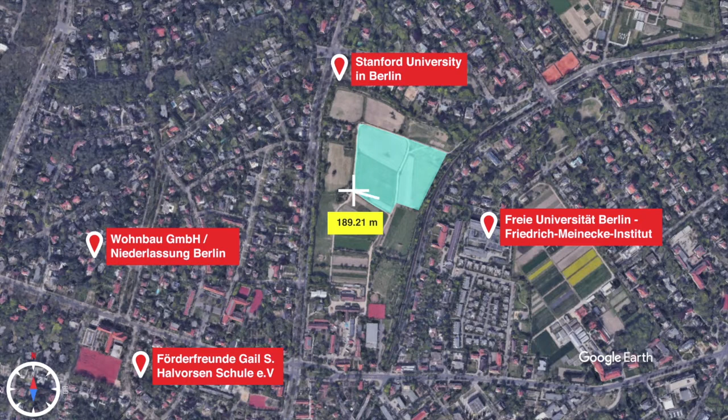The impact of COVID-19 was drastic on schools. Several countries were assessing how to deal with the situation, and for many, options included remote learning. Moving on to the site analysis. From Dubai to Germany, to its capital Berlin, to an area in the southwest of Berlin called Dahlem. The site chosen is accessible by several roads and surrounded by many schools and universities. It is highlighted in light blue.

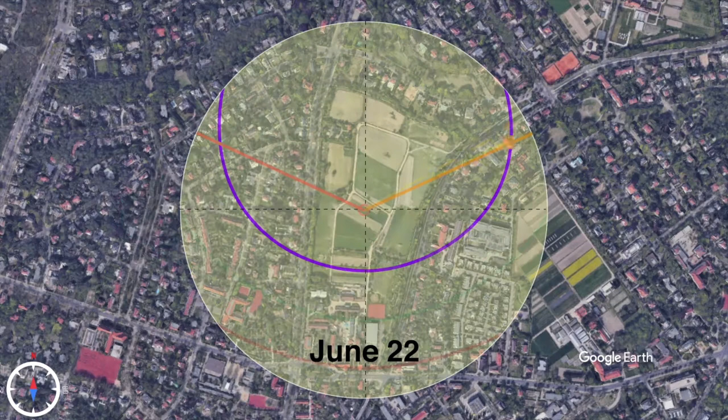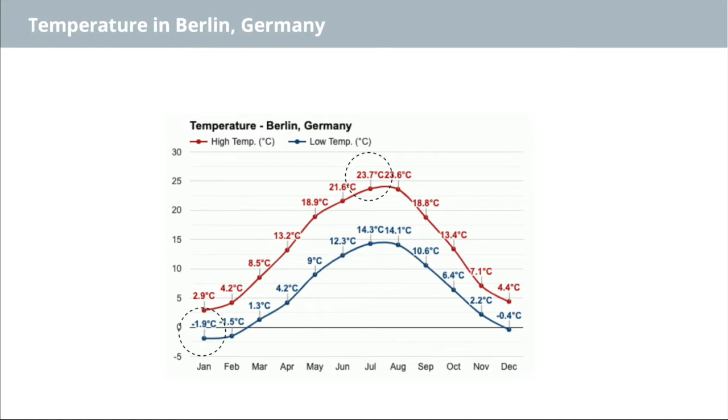Wind direction is from southwest and west. And this is the sun path. As for the temperatures, they reach a high of 23.7 in July and a minus 1.9 degrees in January. Next is the concept and design.

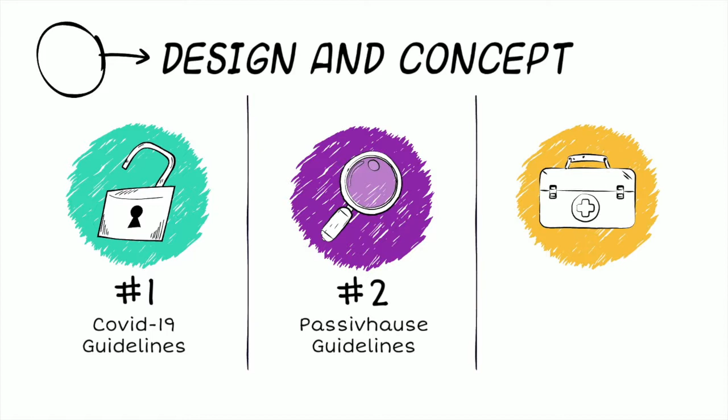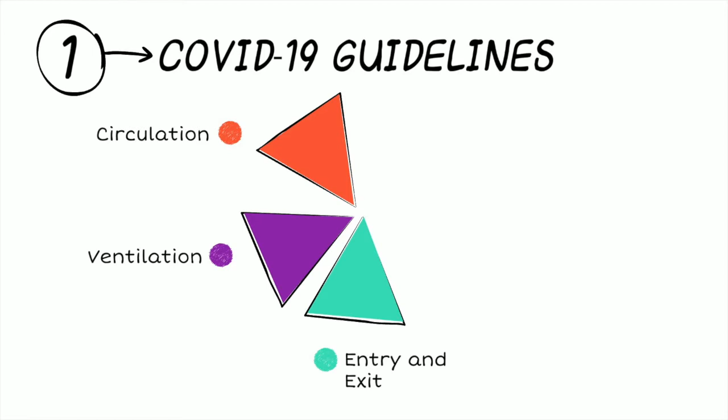The design was derived from the COVID-19 guidelines, the Passive House guidelines, and the immunity system concept. The COVID-19 guidelines for schools recommend one-way circulation, increased ventilation, several entry and exit points, open space, and having points for checking temperature. Passive House was put by Dr. Feist in 1999, and it relied on several things, for example, proper window insulation and proper orientation.

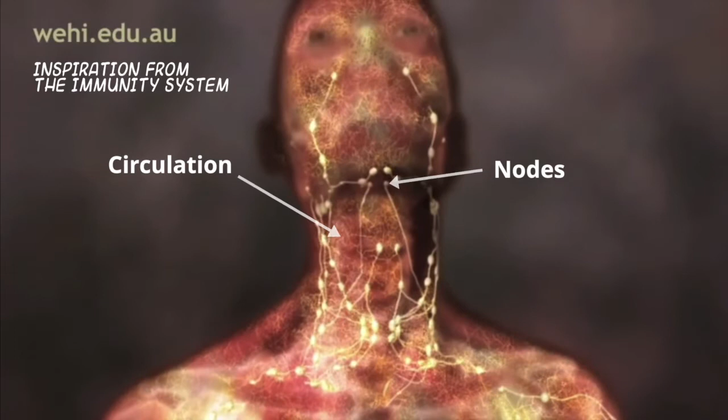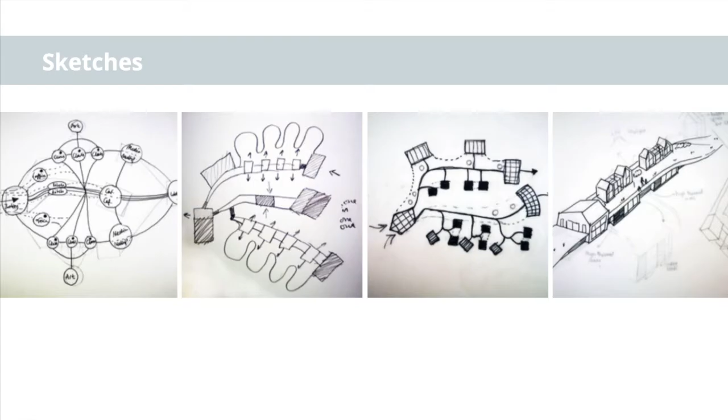As for the concept of the immunity system, it inspired breaking up the school into nodes and connecting it via a circulation path, just like the nodes and the circulation here. In Germany, there's an average of 20 students per class with a ratio of 1 to 12 teacher to student. The school will operate at 40% and fit 80 students due to COVID-19.

The Grundschule will comprise of 2 classroom buildings. On the ground floor, each will have a large open space that can accommodate a lab, an art room, and an eating space. On the upper floor, there will be 2 classrooms. The Grundschule will have 1 main building. Its ground floor includes the lobby, 2 clinics, and 2 isolation rooms. The upper floor is office space.

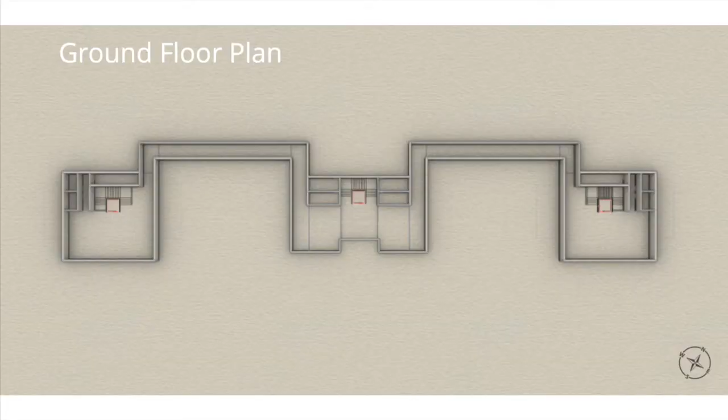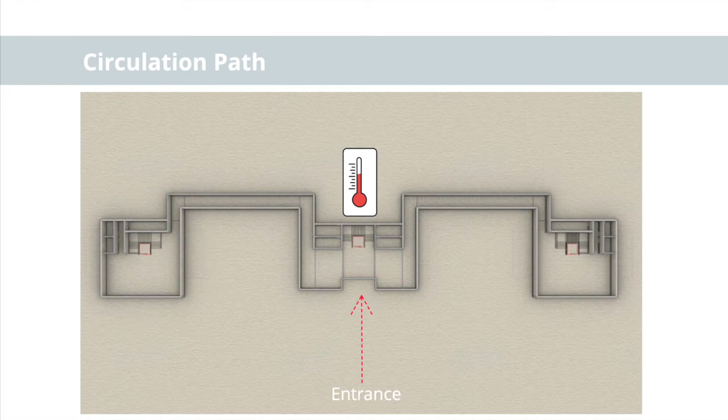In the ground floor, here is the main building with the 2 clinics and isolation rooms. Here is the classroom building's open space. These are the circulation corridors and the circulation cores. Students will enter through the lobby, where their temperature will be taken, to move on to the assigned building and spend their day there, to exit from there.

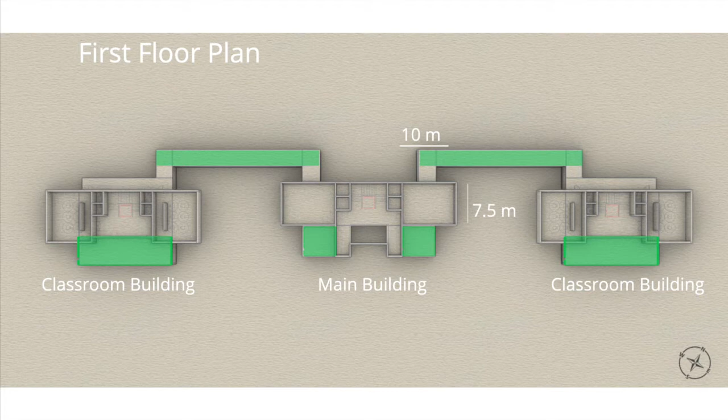For the first floor, there are the main building offices, and these are the classrooms. Desks were arranged to allow for 2-meter social distancing between them. Open balconies were integrated to allow for air circulation. Here's the final design. The fourth step will be IES analysis.

IES analysis will include first comparing the final design to the base case, second, comparing the base case to 3 passive strategies, and finally comparing the base case to adding all summer strategies together and all winter strategies together. Final design's building orientation was aligned with the site at north rotated 315 degrees. Optimum orientation with least energy is at building facing south at 0 north rotation.

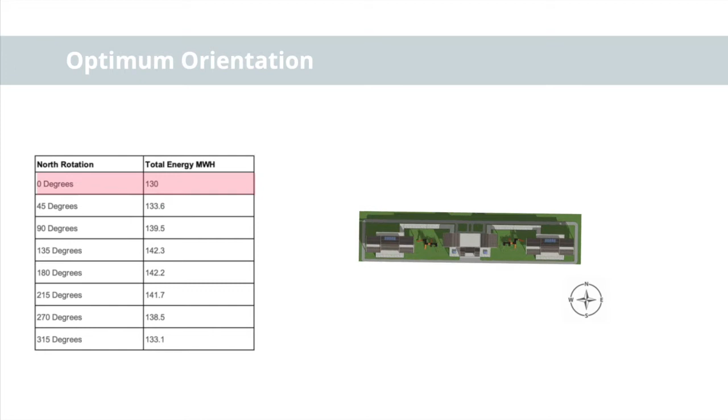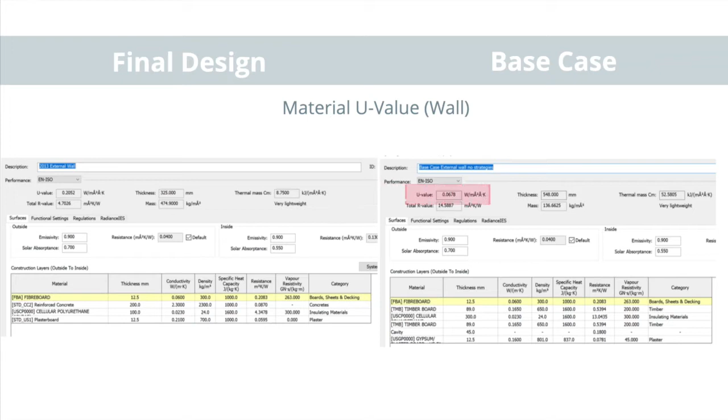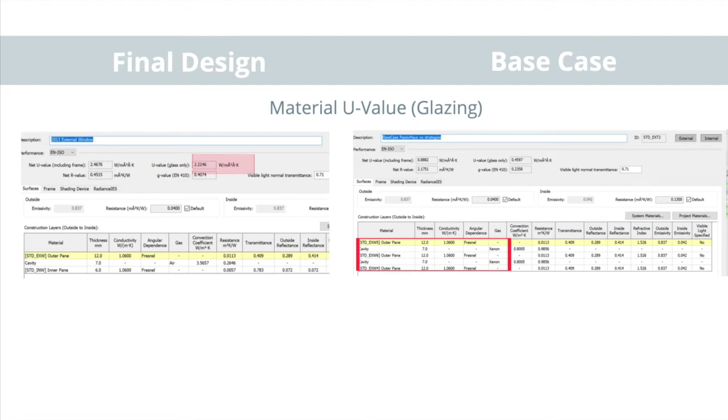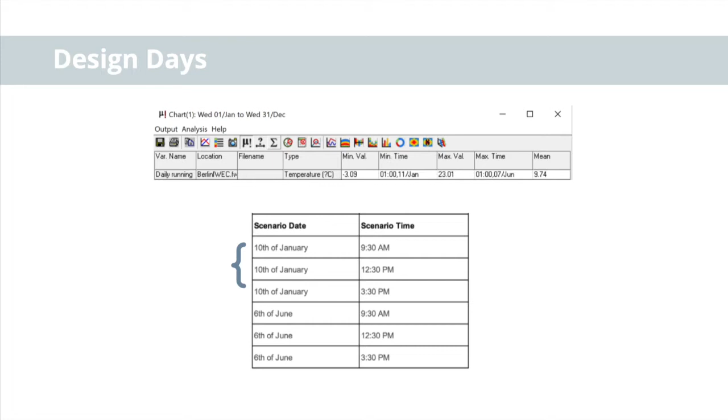Here's the base case design with 20% south-facing glazing, 4% for east, and 2% for west. To assign the scenarios for comparison, daily running mean temperature was used. The results were on days when the school was off. Thus, the next coldest and hottest mean temperatures were chosen, 10th of January and 6th of June.

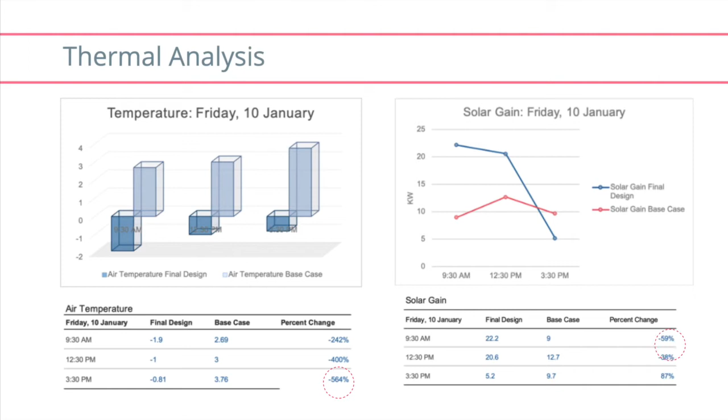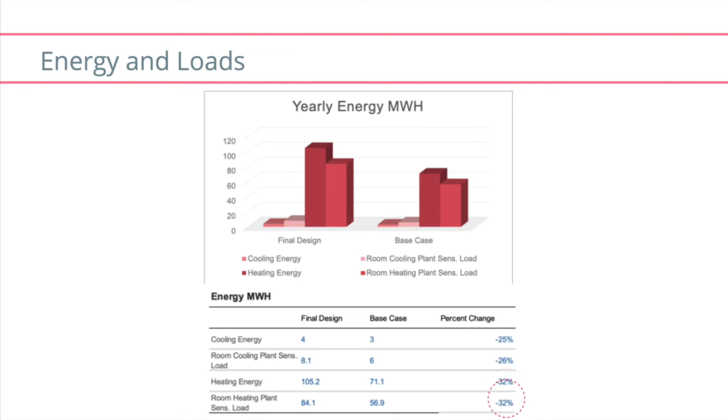For the thermal analysis, there has been an overall reduction by different percentages throughout the day. Similarly, there has been a reduction in solar gain. The improvements also led to an overall increase in the temperature by different percentages throughout the day, while a significant solar gain increase was evident in the afternoon. The change between final design and base case resulted in decreases in cooling energy, room cooling load, and heating energy and room heating load.

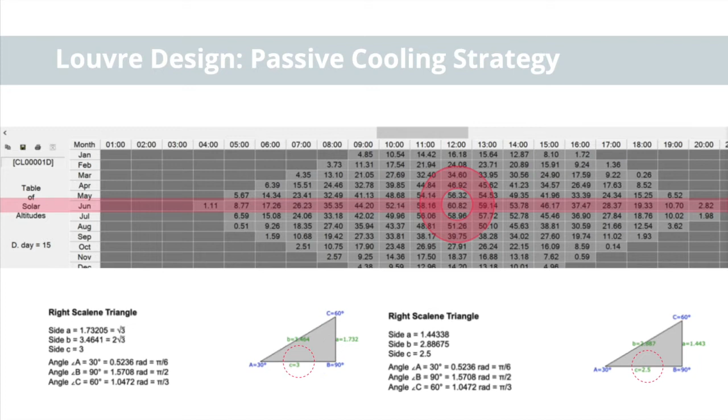For the first strategy, the greatest sun altitude was obtained and used in triangle calculation to get louver length, where uppercase C is the altitude angle, lowercase c is the window height, and lowercase a is the louver length. The prevalent cooler hues when louvers are attached represent reduced solar gain, which corresponds to reduced temperatures by different percentages throughout the day.

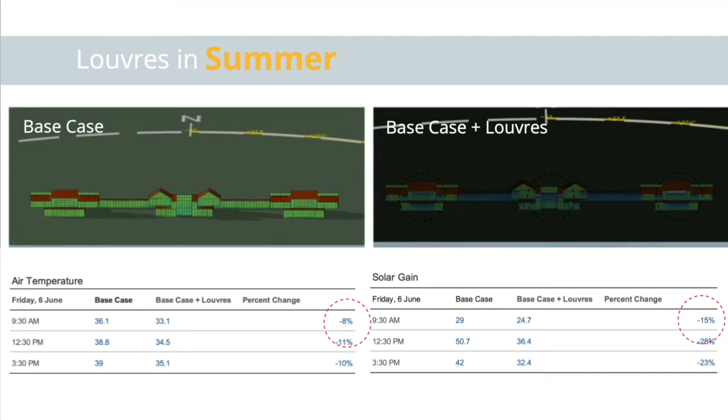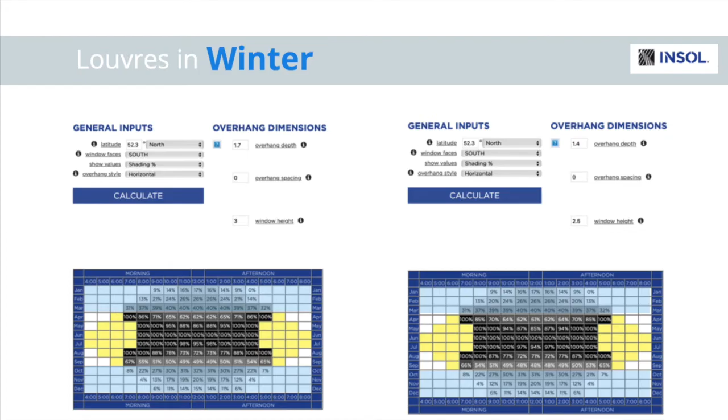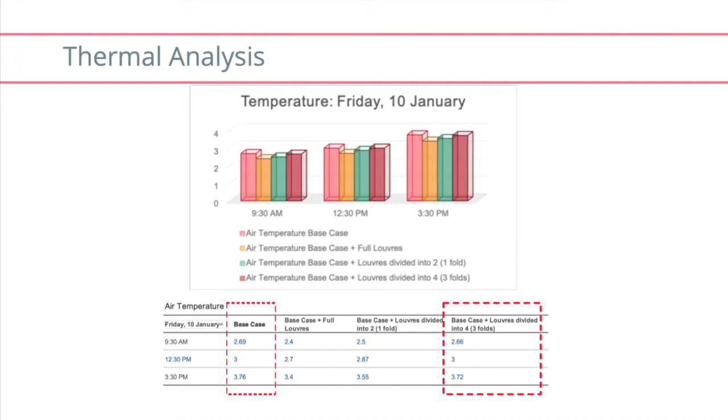A deeper look into the effect of the louvers in winter using insol reveals unwanted shading during the winter months. From there came the idea of folding the louvers in winter to reduce their effect. Having full louvers was compared to one-fold louvers and three-fold louvers. Folding the louvers 3 times resulted in temperatures closest to having no louvers in winter. Consequently, adding the louvers in summer reduced the cooling energy and room cooling load, and folding them maintained the required heating energy and room heating load.

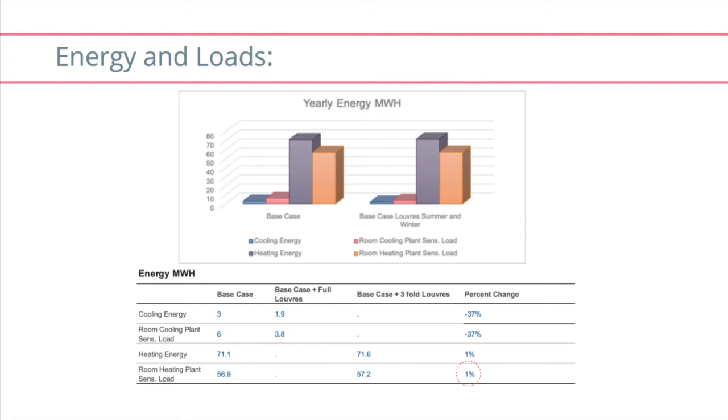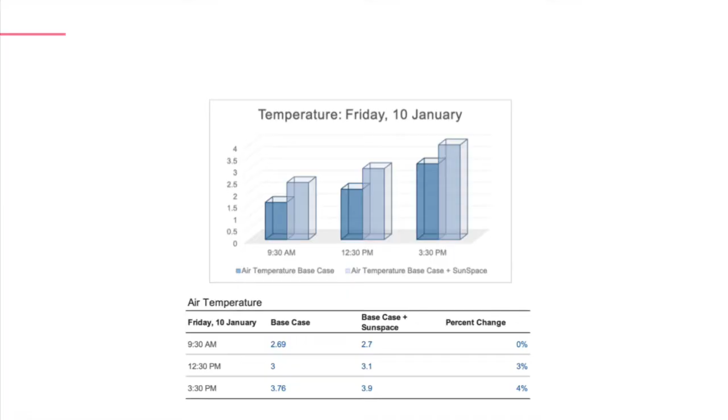Three sun spaces were added to analyze their passive heating effect. A general look reveals increases in temperatures at 12:30 and 3:30 p.m. Let us have a closer look at the main building sun space. Temperature inside the sun space reaches almost 13 degrees Celsius during the afternoon.

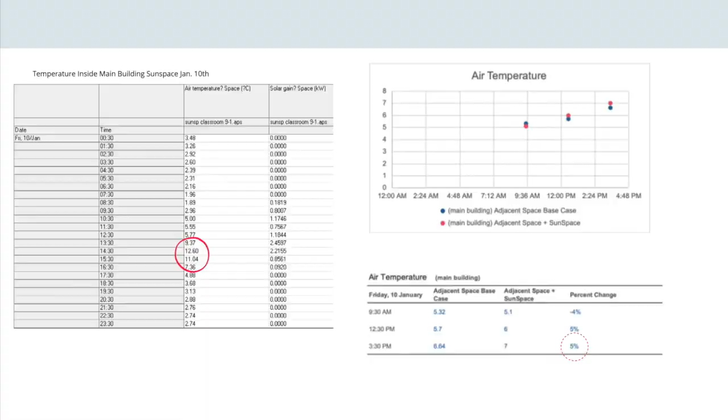Adding the sun space resulted in increasing the temperature of the adjacent space starting from the afternoon when it stored enough heat. Let us have a closer look at the classroom building sun space. Its temperature reaches a high of 15 degrees Celsius in the afternoon, and that is when a significant increase in the adjacent space temperature is evident.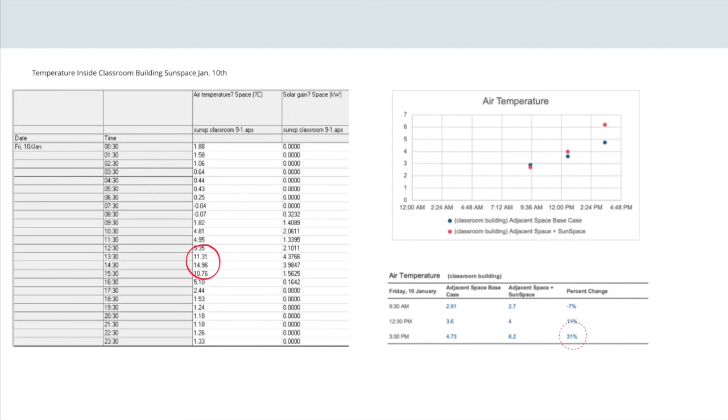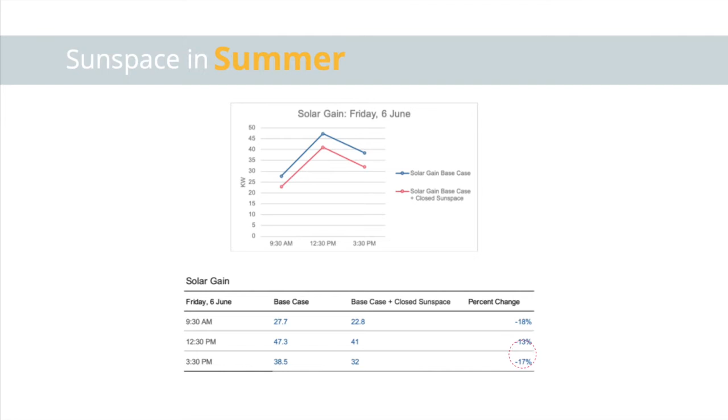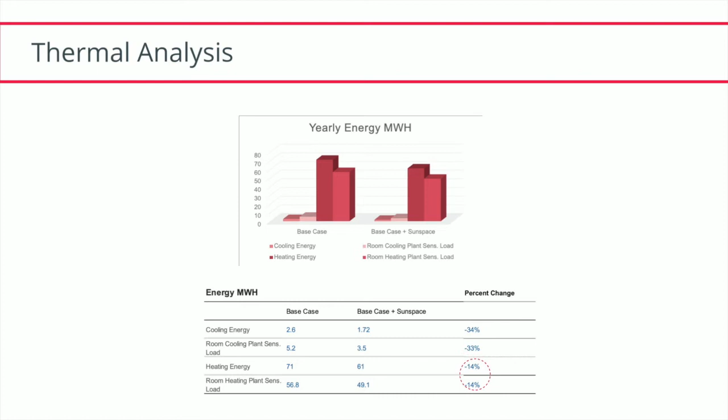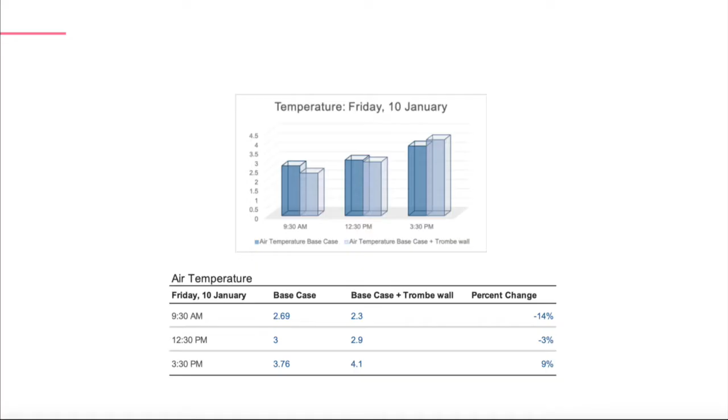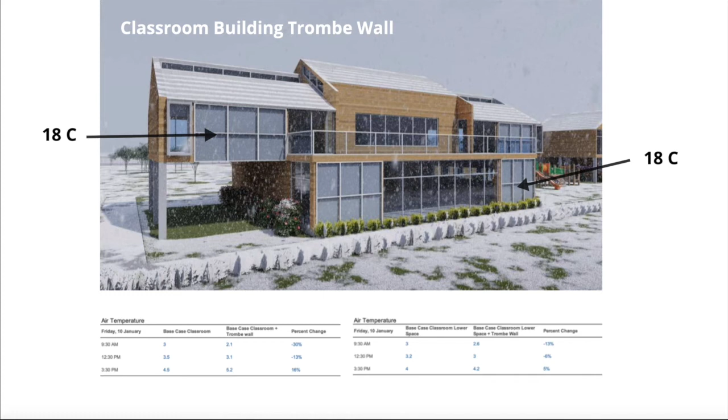A high thermal mass wall with glass spaced at a cavity on its exterior, the trombe wall, was applied to several walls of the south-facing facade of the school. An overall look reveals that the trombe wall affected the temperatures positively in the afternoon, just like the sun spaces when they stored enough heat. It is interesting to note that the temperatures of the trombe walls themselves reach 18 degrees Celsius at 2:30 p.m., just an hour before they raised the temperature of the adjacent spaces.

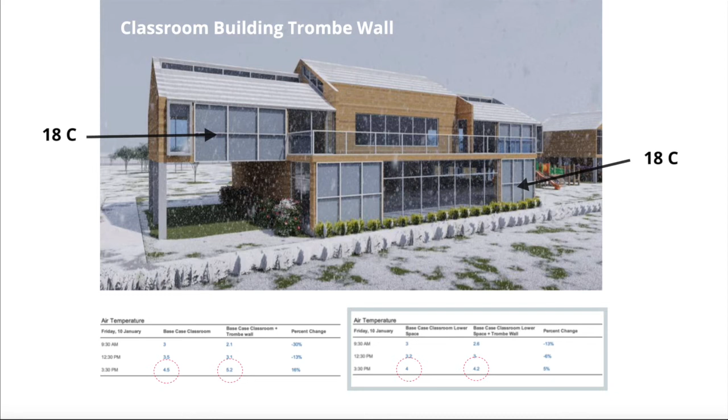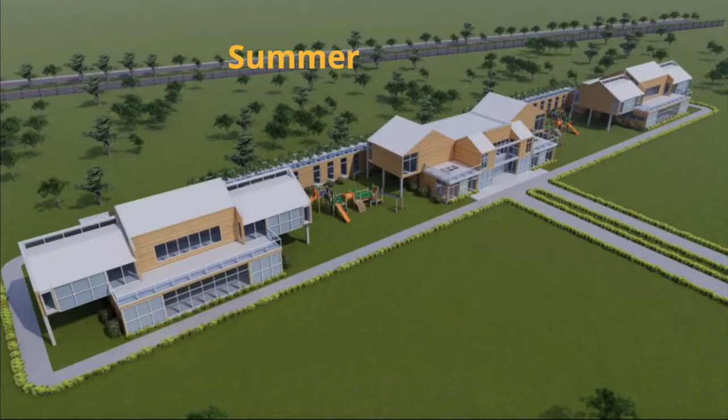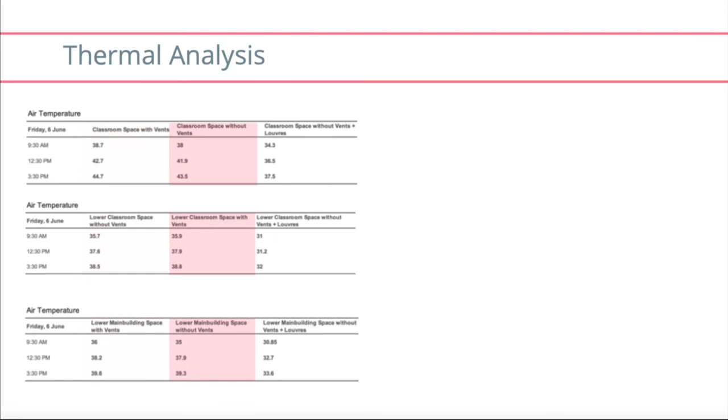The classroom has been more affected by the trombe wall due to a smaller area compared to the ground floor space. Adding the trombe wall reduced the heating energy and room heating load by 9% and 7%. Temperatures of the interior spaces that have trombe walls were recorded to see whether having vents will allow for cooler temperatures or not. Having no vents resulted in cooler interior temperatures. In summer, louvers will extend over trombe walls to shade them.

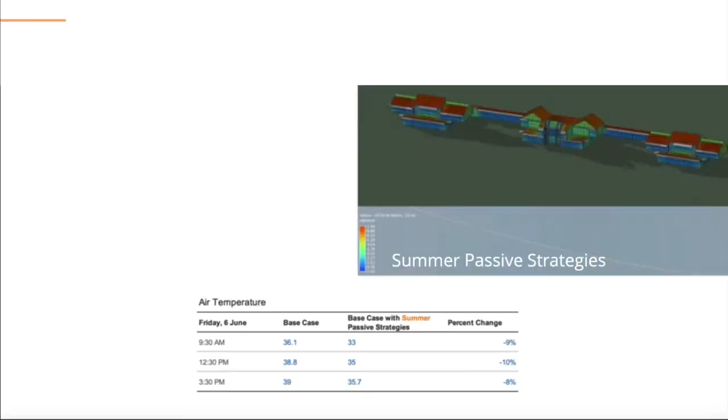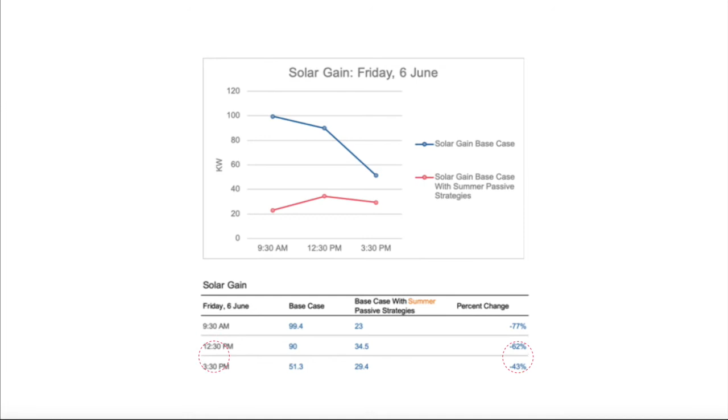For the summer passive strategies, the louvers will be extended, the sun spaces will be closed, and the trombe walls will be shaded. The more blue hues represent reduced solar gain. Consequently, temperatures were reduced by different percentages throughout the day. Solar gain has also been reduced throughout the different timings due to increased shading. Let us have a closer look at the classroom.

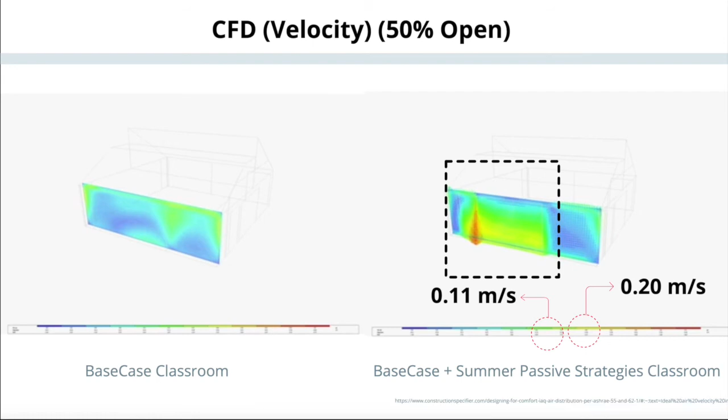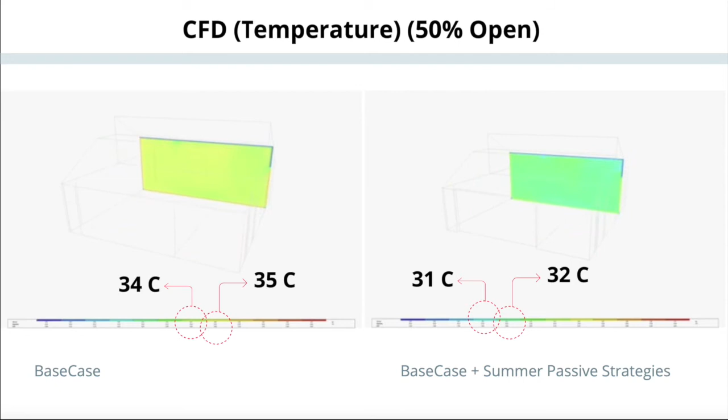Looking at the right, that visible down push of wind near the window is due to having louvers. The concentrated yellow hue of 0.2 meter per second here is the recommended velocity for cooling by ASHRAE. As for the temperature, the mix of green and turquoise colors in the passive case on the right represents 9% decrease in temperature compared to the base case. The conditions in the passive classroom on the right are in closer proximity to the neutral zero.

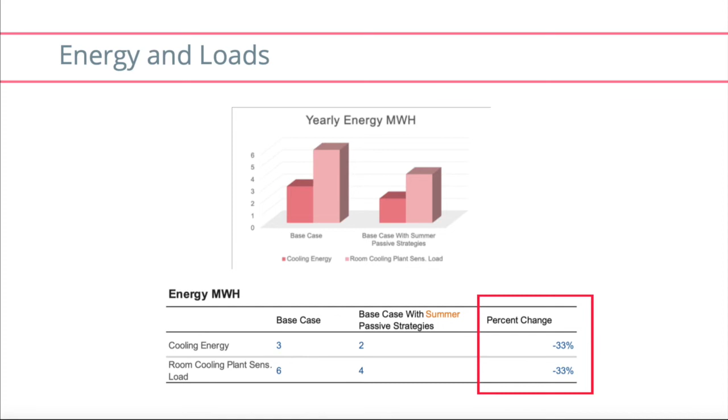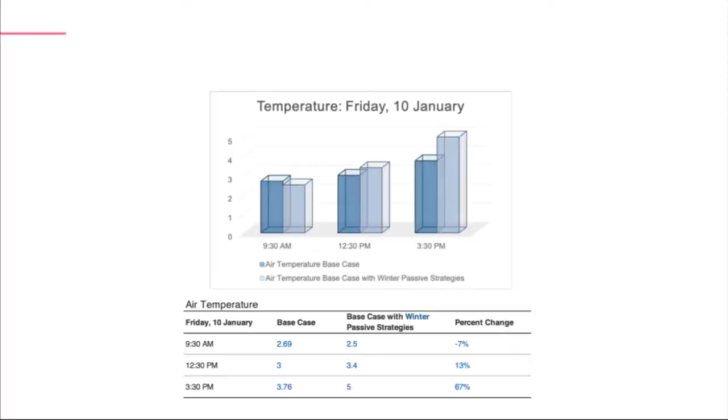Finally, there has been an overall 33% reduction in cooling energy and room cooling load comparing the summer passive strategies case to the base case. For the winter scenario, louvers will be folded above windows and trombe walls, and sun spaces will be open. The pattern of afternoon increase when the passive heating strategies have collected enough heat is reflected here in the overall building temperature at 3:30 p.m.

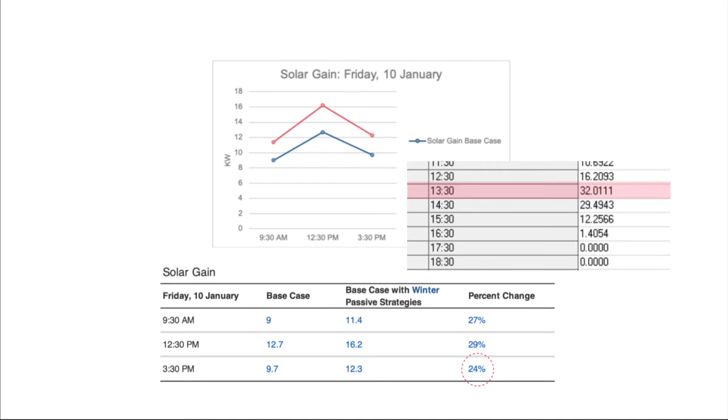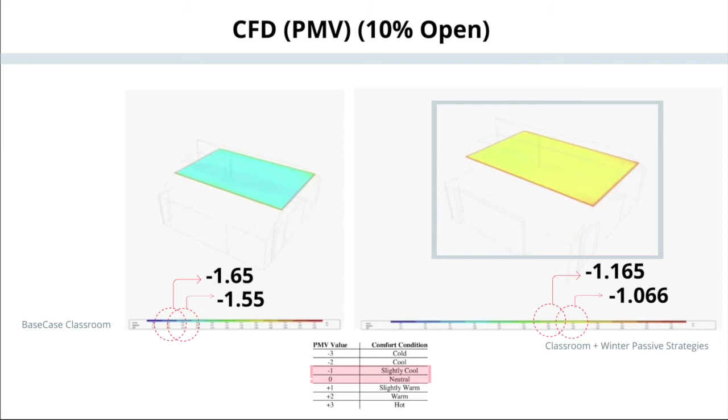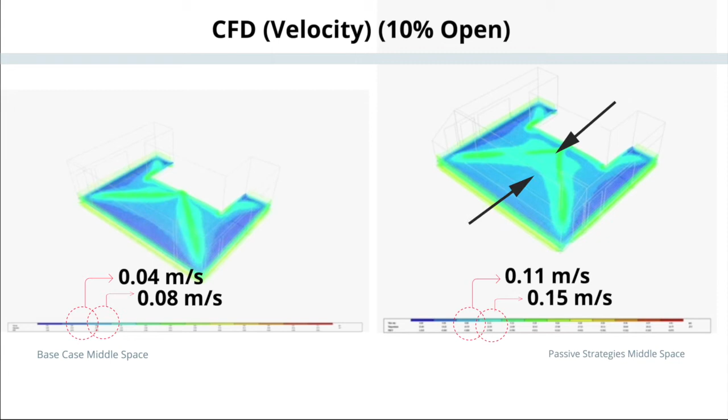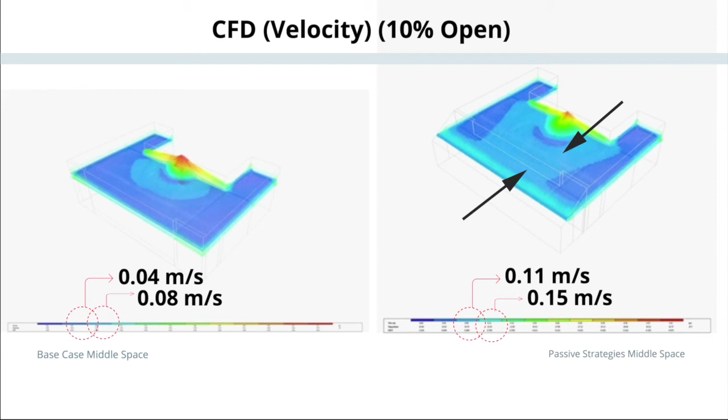To the final stop, the conclusion. For the passive cooling strategy of adding louvers, it is a simple strategy that, when calculated right, results in significant reduction in money and energy. For passive heating sun spaces, solar heat is collected, then transferred to adjacent spaces. The design of the school allowed for having two, and the one in the classroom building worked better than the other due to several reasons. One, having it lifted above ground, which resulted in more solar exposure. Two, having the space behind it smaller resulted in more pronounced effects of sun space. And three, the flat elevation behind it reduced shadows that decreased solar gain.

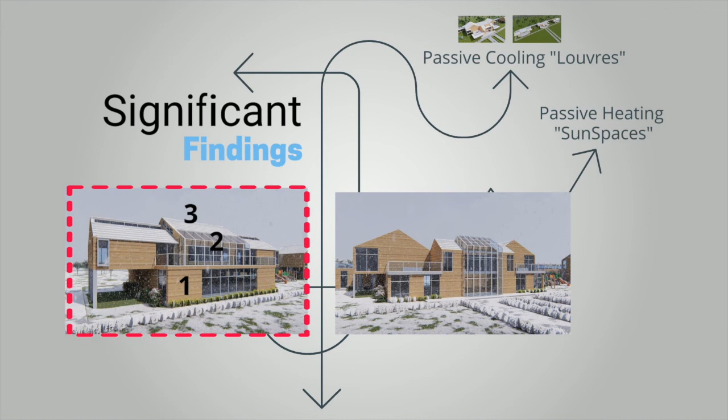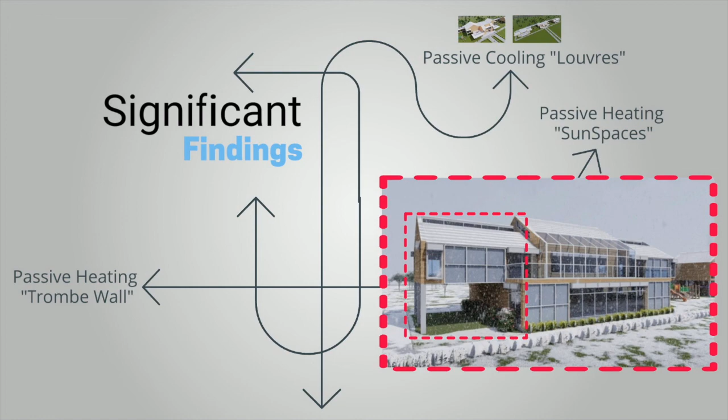As for the trombe walls, they were assigned to the resulting south-facing walls after calculating the passive house 20% south-facing glazing. The reason was to maximize views and daylighting and to prioritize the more efficient window direct solar gain. The effect of the trombe wall was quantifiable in the classroom due to the classroom's smaller area. Improvement from final to base case was significant and was due to material and orientation change. Improvement from base case to strategies was most significant when reducing solar gain through louvers. For future research, sun spaces propose interesting thermal and aesthetic potential.